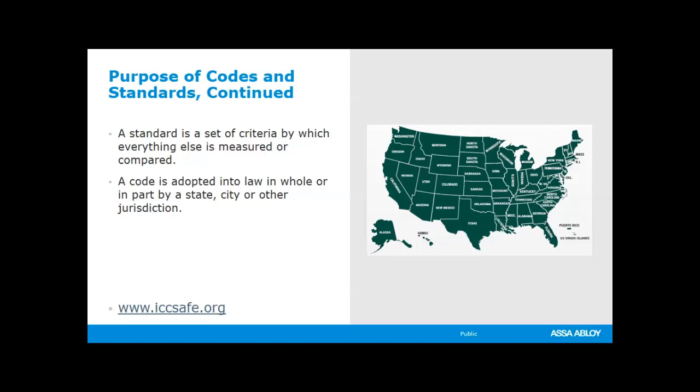And sometimes you may have to compare the two to find out what that is. Sometimes you may have an architect or a contractor that can tell you, but when in doubt, you do need to look it up rather than make assumptions.

These are comparisons that I have created, and I will send these to you after, but it goes through the different code versions, IBC 2006 through IBC 2018, and where the specific code reference is, as well as NFPA 101, 2006 through 2015.

As you can see with controlled egress, we can only use that in two types of occupancies. And one of the occupancies that can use it happens to be one we'll be talking about today, Group I1, assisted living. And those are going to be your senior memory care, where you have custodial care for the people that are living there. And it started in IBC 2015 as well as 2018.

So if you have a project that is under IBC 2012, you cannot use controlled egress. If you have a project that's IBC 2015, you can. NFPA 101 has allowed it since 2006. You'll hear me say AHJ, the authority having jurisdiction. You may have a fire marshal or local AHJ that will allow it, even though IBC doesn't, and that's okay. They have to grant a variance. They have to say that it's okay in writing for you to do that.

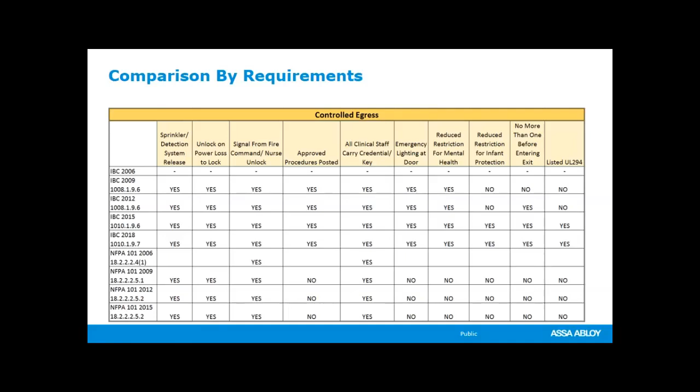Delayed egress. Delayed egress has a lot more use in the different types of occupancies. The only ones that can't are Group A, assembly, Group E, educational, and Group H, high hazard. So unless you have an assisted living facility that has assembly mixed in, for example, the dining area, if there's a dining area and you have more than 50 people, you cannot use delayed egress. If you have Group I1 assisted living, which is the 5th column over, you can use delayed egress virtually everywhere as long as you follow the requirements in the code.

And Group R residential, I point this one out because assisted living could be a residential occupancy. And I will explain that in just a moment. There's two different ways we can classify assisted living facilities. And it's very critical that you know for your project area which one it falls under. It changes dramatically what you can and can't use for hardware.

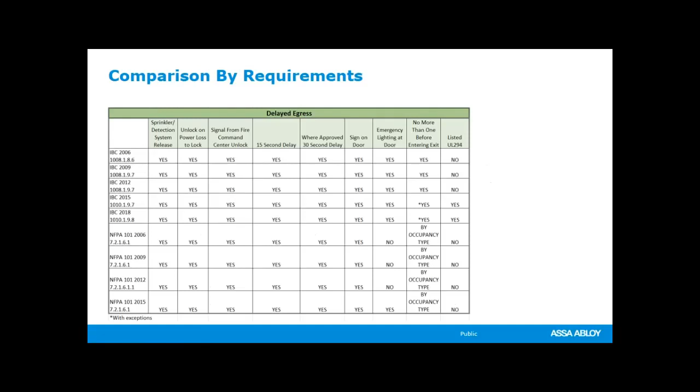So after comparing the different occupancy types by code, I also have a cross-reference of the requirements for delayed egress. And they're very similar, as you can see. The code references might change slightly, but it gives you a chance to know exactly where to go to look it up and a snapshot of the different code versions, what is or isn't required.

Means of egress: I want to make sure that we are on the same page, because where you put controlled egress and where you put delayed egress matters, because in some cases you can only have one in a path of egress. So what is a path of egress? It is a continuous and unobstructed path of vertical and horizontal egress travel from any occupied portion of a building or structure to a public way. And a public way is just safety.

A means of egress consists of 3 separate and distinct parts: the exit access, the exit, and the exit discharge. We do have many exit access doors within a project. Most of the doors in a building are exit access doors. They lead you to an exit. And so because of that, we have to treat exits and exit access doors the same when it comes to hardware, but it's important to understand the distinguishing difference.

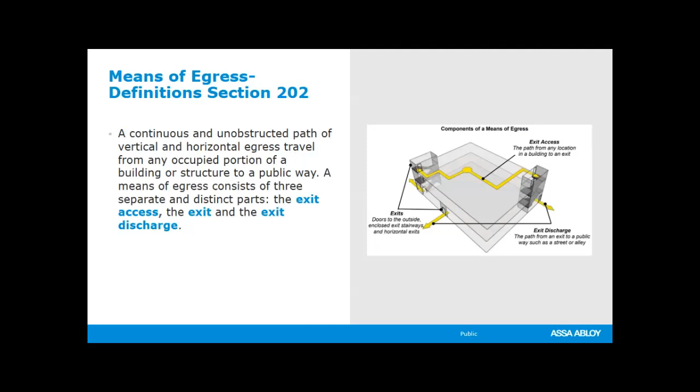The exit access is that portion of a means of egress that leads from any occupied portion of a building or structure to an exit. So all the area shaded in gray is that exit access. If I am here in the multi-purpose room, this is exit access. This would be an exit access doorway. And I get out to the corridor. I have the choice now between 2 separate exits. I can go left to this exit stair or take a right and go to this exit stair. I'm probably going to go to the closest one unless I smell smoke or see fire heading in this direction.

So you go out, exit access. All of the doors on this floor would be exit access doors, except for the ones going into the stairs, and those are actually the exit. The exit is that portion of a means of egress system between the exit access and the exit discharge or public way. Exit components include exterior exit doors, which many of us think of when we think of an exit. Those are indeed an exit, but also interior exit stairways are an exit. Exit ramps, exit passageways, exterior exit stairways and ramps, and horizontal exits.

So once we get into the stair, we are now separated from the rest of the building. We have fire protected openings and fire resistance rated walls, floors, and ceilings. In a high-rise building 4 stories and higher, we have 2 hours of protection and 90-minute B-label fire doors protecting the stairs. If it's 3 stories or less, it's 1 hour fire rating and 1 hour protection for the door.

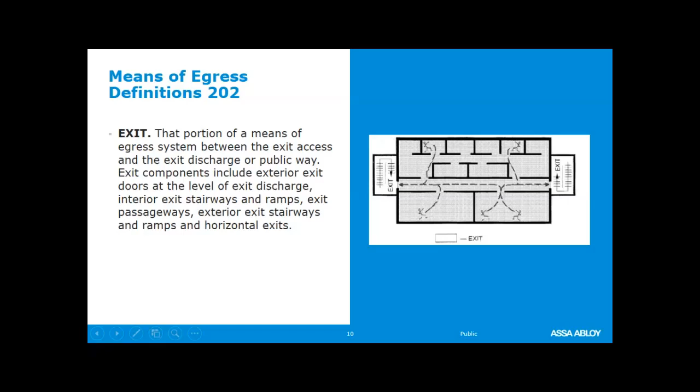A horizontal exit: if we have a very large building, the maximum size of our fire compartments or smoke compartments is 22,500 square feet. And therefore you'll see a horizontal fire barrier that separates this part of the building from this part of the building. So if the fire starts in this fire compartment, once I cross through this double egress door, I'm now not in the compartment of the fire origin, and I am protected by 2 hour fire barriers for 4 stories and higher, or 1 hour fire barrier if it's 3 stories and less. So these double egress doors become an actual horizontal exit.

Once I get through this door, I'm still on the same level, but I could either wait for someone to rescue me, I'm in what's called an area of refuge, or I can continue my path of exit travel, get to a vertical exit stair, and down the stairs and out of the building. So horizontal exits, you'll see those in memory care and assisted living facilities all the time. Not all of them are horizontal exits, however. They have to be B-labeled fire doors in order to be an exit. Other than that, it's an exit access or a smoke barrier, and those are completely different. They're still in our means of egress, though.

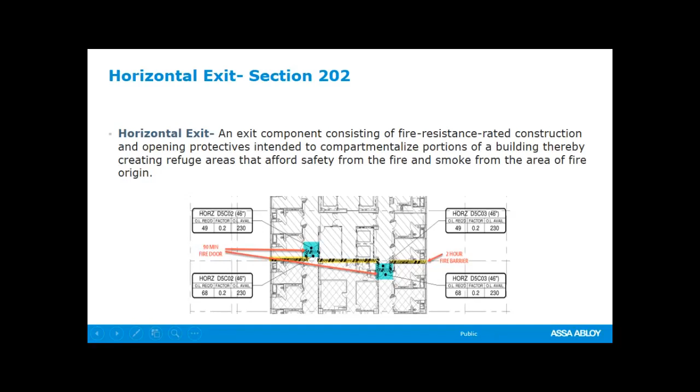Okay, so different types of occupancies. I mentioned institutional group I. It's defined in the building code in chapter 3. What you will be most using would be the I1 assisted living facility. And the difference here is because it's institutional, this is where patients have 24-hour supervised environment and receive custodial care. And because of that, people are not capable of self-preservation.

In the middle of the night, if there was a fire and people had to evacuate the building, these people are not capable of getting out of bed and walking to the exits by themselves. They're going to need some help from the clinical staff. And that's why we have areas of refuge where they may move the patient while they're still in their bed. And that's why we see wider doors in assisted living facilities that are custodial care, as well as healthcare facilities, your hospitals and nursing homes. So I know you do a lot of different assisted living facilities. If it's custodial care, then it falls under the I1 classification or designation.

The residential group R assisted living facilities are group R4. They are supervised facilities, but the patients are capable of self-preservation and they don't have to rely on staff to evacuate them in a fire or other emergency. R4 occupancies are independent living facilities. The occupants can exit the building, as I mentioned, without assistance.

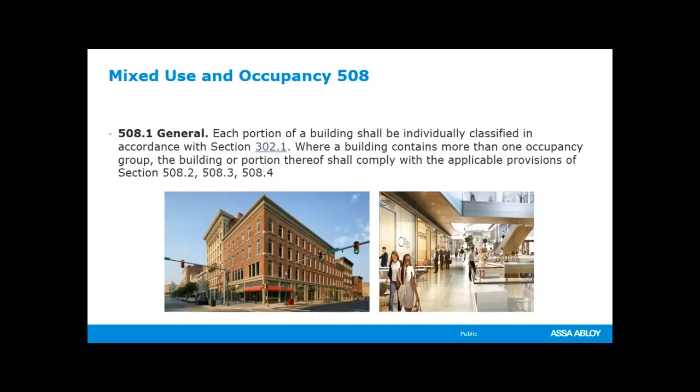Okay, so locking the door on the egress side. Unless by specific permission, we are supposed to have free egress, one motion free egress from the egress side, unless by exception. So in 1010.1.9.3, and this is IBC 2015, locks and latches shall be permitted to prevent operation of doors where any of the following exist. 1, places of detention or restraint.

This is typically talking about mechanical locking hardware on the egress side. And this is left wide open so that the AHJ can assess the risk based on the number of occupants, the type of facility, the type of structure. Is it a wood frame structure or is it steel stud? Is it concrete walls? Are they fully sprinklered? They will assess the risk based on all of those factors and then determine whether or not you can lock the door on the egress side. And again, this is from a mechanical standpoint.

There are 4 special locking arrangements that the code recognizes, and that's where controlled egress and delayed egress fall into. So unless by specific permission, we can't lock the door on the egress side. Controlled egress, we are actually locking the door on the egress side with a mag lock. This is a typical cross-corridor pair of doors, and this is actually in a hospital. It could very easily be assisted living, but the card reader will release the mag lock from the egress side and allow me to exit. If I'm not authorized, then depending on where this is in the building, it probably needs to be tied into the fire alarm to release so that at the time of fire, I can exit the door.

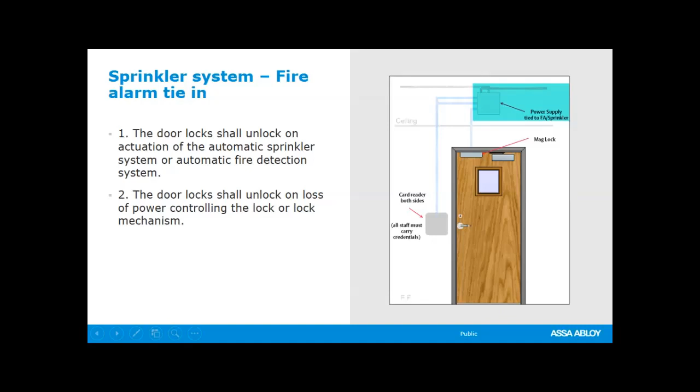3, the door locking system shall be installed to have the capability of being unlocked by a switch located at the fire command center, a nursing station, or other approved location. The switch shall directly break power to the lock. Because it's electrified, any switch can be wired to unlock remotely, whatever the distance away. So this really is very easy to achieve. And you may or may not be the one that is supplying all of those different switches, but just be aware that it is a requirement.

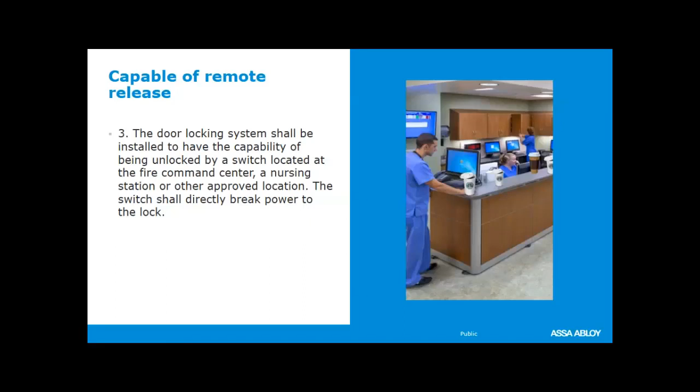4, a building occupant shall not be required to pass through more than one door equipped with a controlled egress locking system before entering an exit. That's why I went through the definitions. When we look at our life safety plan and you look at the location of controlled egress and the location of your exit, you're not allowed to have more than one in a path of egress before entering that exit.

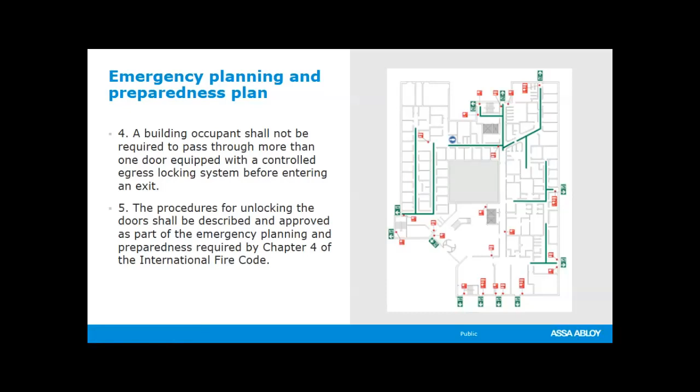Procedures for unlocking the door shall be described and approved as part of an emergency planning and preparedness as required by Chapter 4 of the International Fire Code. And 6, all clinical staff shall have the keys, codes, or other means necessary to operate the locking system. So whether this door starts in a locked position or not, with the card reader, all staff must carry the credentials in order to unlock this door on the egress side.

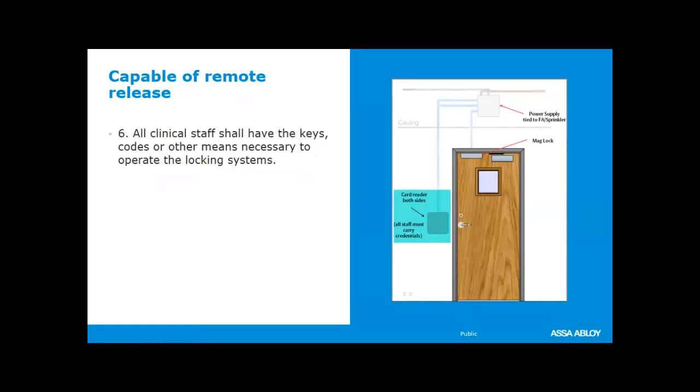Emergency lighting shall be provided at the door, and the door locking system unit shall be listed in accordance with UL 294. And as you can see, this is from Securitron. These are all the various listings. UL 10C is for fire. UL 294 is an access control standard.

And there are a couple of exceptions which will not pertain to you. Items 1 through 4 shall not apply to areas of behavioral health or psychiatric treatment. And items 1 through 4 shall not apply to infant protection systems. There is no group of exceptions for memory care. Maybe someday they'll add it, but out of the box, you have to meet all of the requirements for controlled egress, and you are not exempt from items 1 through 4. So the most common applications of controlled egress would be behavioral health areas, dementia units, memory care units, infant patient wings, maternity wings, etc.

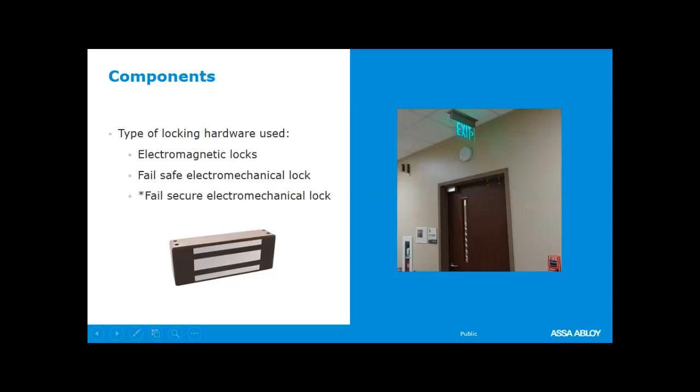And the type of hardware that you would use, the types of components, you're going to have a mag lock most of the time. It's fail-safe by nature, or you could use a fail-safe electromechanical lock, either a cylindrical or mortise lock that is locked on the egress side, and only by exception could you use fail secure, and that's for behavioral health or infant protection. It does not apply to your types of projects.

Securitron makes a whole line of mag locks from 600 pounds to 1,200 pounds holding force, or 1,800 pounds of holding force. They make other types, and typically with memory care, you're somewhere in the 1,200 pound range.

Delayed egress is the second special locking arrangement. This one is going to sound an alarm. I think everybody's familiar with what delayed egress is. Let's look at our requirements. As I mentioned before with the cross-reference chart, delayed egress is used in more applications than controlled egress. This does lock the door on the egress side, and it can be used anywhere except for Group A, which is assembly, Group E, which is educational, K through 12, and Group H, which is high hazard.

So the only place in your building that you need to look at is if you have some Group A intermingled with your I1 assisted living senior memory care. That dining area, if you have a dining hall that has more than 50 people, that's Group A assembly, and you can't use delayed egress or controlled egress from those spaces. And that can get a little bit tricky. They either need to separate the dining area completely so it has its own exits directly to the outside, or they need to come up with some other way.

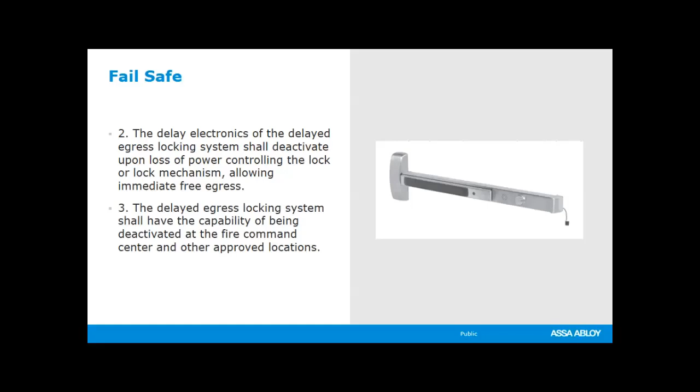4, an attempt to egress shall initiate an irreversible process that shall allow such egress in not more than 15 seconds when a physical effort to exit is applied to the egress side door hardware for not more than 3 seconds. There is a nuisance delay that's built in. If little Johnny is visiting his grandma and he can't read the sign that says push, there's a loud alarm, and his mom pulls him back away after he pushes on that exit device or pushes on the door, as long as she pulls him away before that nuisance delay, it will not set off the alarm. But initiation of an irreversible process shall activate an audible signal, a very loud alarm in the vicinity of the door.

Once the delay electronics have been deactivated, rearming the delay electronics shall be by manual means only. That means that somebody from the assisted living facility needs to come to the door, check it out, what happened, what set this off, and rearm at the door. Most delayed egress systems have a built-in key switch. It can be a key switch, it could be a card reader, it could be any kind of other than just a push button switch that anybody can reset. It's got to be something that carries a credential in order to rearm the delayed egress.

And there is an exception for where you can have 30 seconds, but that typically does not apply to memory care units unless you talk to the local AHJ and get it approved.

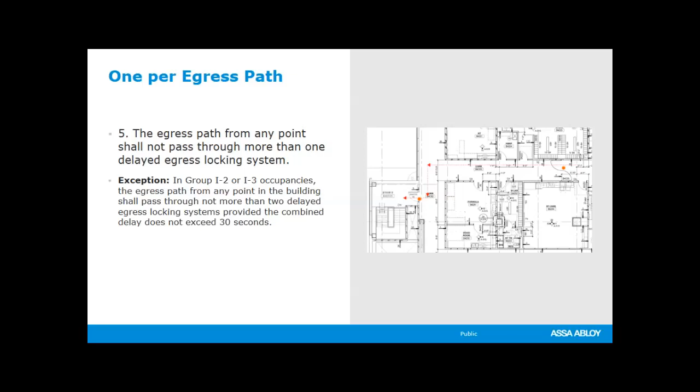A sign needs to be provided. Most of your hardware comes with a sign that says push until alarm sounds, door can be opened in 15 seconds. Emergency lighting provided on the egress side of the door, and delayed egress locking system in accordance with UL 294.

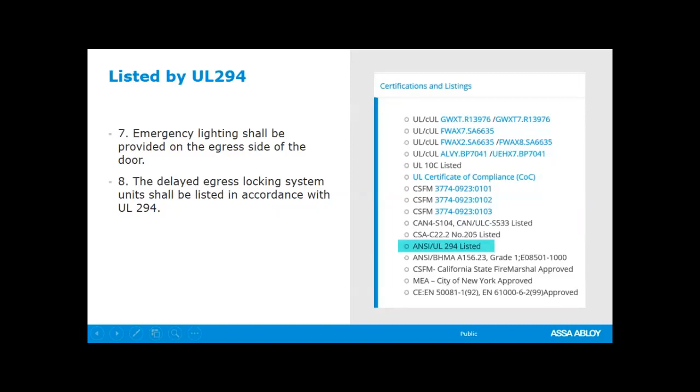The most common applications: the side or back door of a business, the side or back door of a store, doors in hospitals to restrict public access. And from your perspective, you can use these either in I1 or R4, senior living and memory care, to restrict the wandering elderly patients.

Types of hardware that can be used: Securitron makes a delayed egress mag lock that has everything built in. It has the key switch to reset built right into the unit. These are great if you have an existing door with existing mechanical hardware. You just have to get wire to this and tie it into the system however you need to.

If it's new construction and you don't need an exit device, you could use this with a cylindrical lock or a mortise lock. Depending on the type of door that they have, how wide the stile is will dictate the type of hardware that you should kind of lean toward. You can also get exit devices with a full built-in delayed egress. Sargent makes them, Corbin Russwin, Yale.

At Sam's request, I will be making some generic hardware sets specific to both controlled egress and delayed egress, so that you've got the list of components. What normally goes into this type of opening, whether it's an exterior door, a stairwell door. We'll talk about stairwell reentry here in just a minute. And then maybe even some other typical interior doors. But to start off with, I will be creating hardware sets typical for exterior doors and stairwell doors that you will normally be supplying these components.

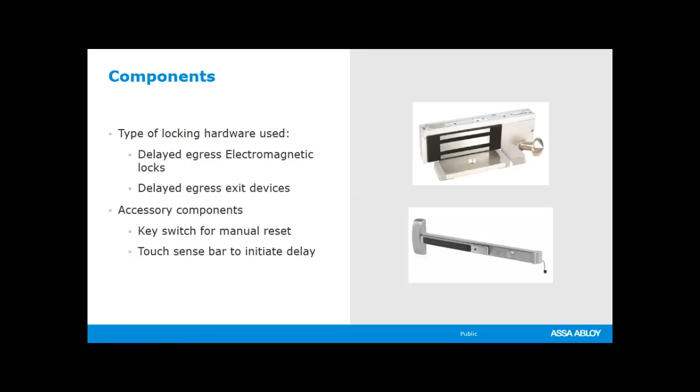There needs to be some kind of key switch or manual reset that takes a credential. It could be a card reader even. You may need a touch sense bar to initiate the delay, depending on the type of unit that is selected.

And just once again, to refresh your memory, controlled egress can only be used on I1 assisted living, 2015 and 2018 IBC. Anything prior to that, you need a written variance from your local authority having jurisdiction. NFPA 101, it's been in there for years. So you may be able to get permission fairly easily, since it is something that's been out there for quite a long time. You may not have too hard of a time getting approval for it.

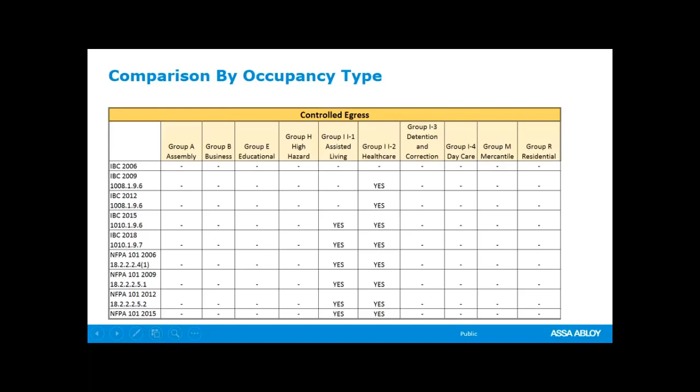Delayed egress is used in both the I1 assisted living or the R4 assisted living. You can use it on either. Just remember the rules: no more than one in a path of egress.

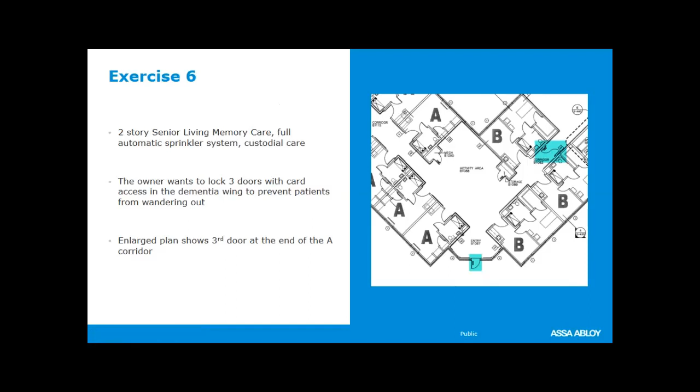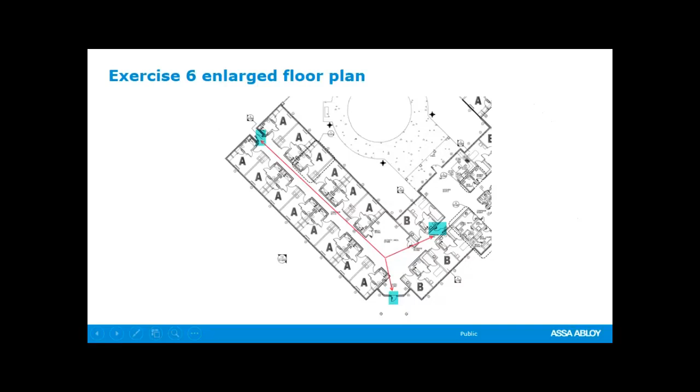here, here, and here. So if a patient gets up and they're wandering and they're within this door, the WanderGuard would lock the door. How would we do that? What is the occupancy type and what code compliant hardware? I'll just give you a minute to think about that for yourself.

And the answer is, it is Group I-1 assisted living because it is custodial care. And because of that, if we're going by IBC 2015, which this presentation has been, that means that we could use either controlled egress or delayed egress.

And the nice thing is, these doors are all three separate paths of exit. So this is one exit. Here's a different path to that exit. And this may be an exit access to get to this door. It doesn't at this point really matter because it's a different way from the other two. So we could lock all three of these doors to keep this wing secure from the other.

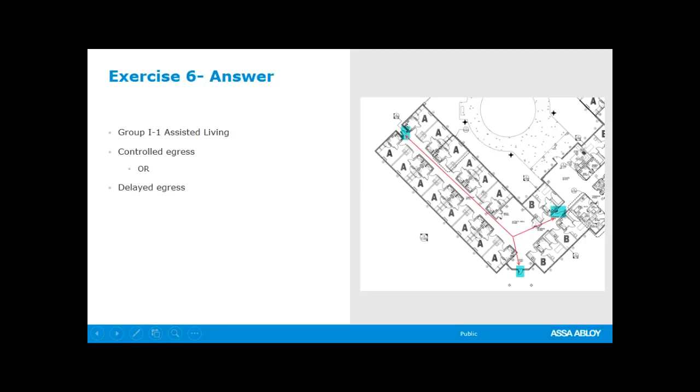And as I mentioned, whether you use a mag lock for the controlled egress and it only locks when the patient is picked up on the sensor, or delayed egress where it's always locked and when they're within range of the sensor, it sends staff and they go get them before hopefully they sound the alarm.

And the last thing I want to talk about code-wise before we get into the hardware is stairwell reentry. What is it and why is it? When we think of stairs, a stair is an exit. It gets us out of the building. And we're protected once we get into the stair with fire barriers that are either 2-hour rated or 1-hour rated, depending on the height of our building.

The longer that we're going to be spending in that exit, in that vertical stair, the more protection we need. So 4 stories and up, 2-hour fire rating, and 3 stories or less, 1-hour fire protection rating. But once you get into the stair, you should be home free. The stair is going to take you down to the level of exit discharge. The door at the bottom of the stairs gets us out of the building and free and safe.

But what if you get into the stair and as you're exiting, you smell smoke? Now, typically, there's nothing flammable in stairs. They keep the stairs clear of any obstruction. There shouldn't be any boxes or any flammable materials sitting in the middle of the stairs. But we do know it's a changing world and people are flying airplanes into buildings and therefore taking stairs and making them basically a chimney. Or this was an actual fire in 2003 at the Cook County office building in Chicago.

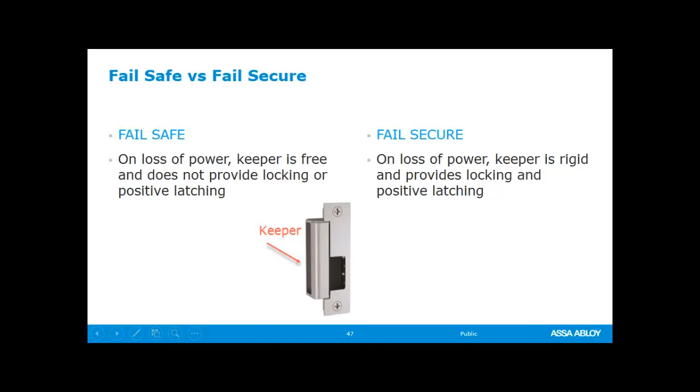So when we think of stairwell re-entry, electric strikes are not permitted. In order to have re-entry, we'd have to make them fail safe, but that doesn't provide positive latching, and 99.9% of the time, they're going to be fire rated doors. They have to have positive latching.

And then mag locks do not provide positive latching. They are fail safe and fail safe only. They are unlocked on loss of power. They must meet special locking arrangements. So if you're going to use a mag lock going into a stair on a memory care unit, whatever the case may be, you have to have some other type of latching hardware, either a mortise lock, a cylindrical lock, or an exit device. It will be passage on the stair side, so the mag lock locks the door. On fire, it would drop, and you could get in or out of this exit door.

IBC, low rise versus high rise. Low rise stairway doors need to comply with Chapter 10 of the IBC. High rise stairway doors, the hardware is exactly the same. There's one additional requirement that doesn't affect what we supply or what you would be supplying, but high rise stairway doors are covered in Chapter 4 under the special use and occupancy type. But the difference is when you have 75 feet or higher above the lowest level of fire department vehicle access, that's considered high rise.

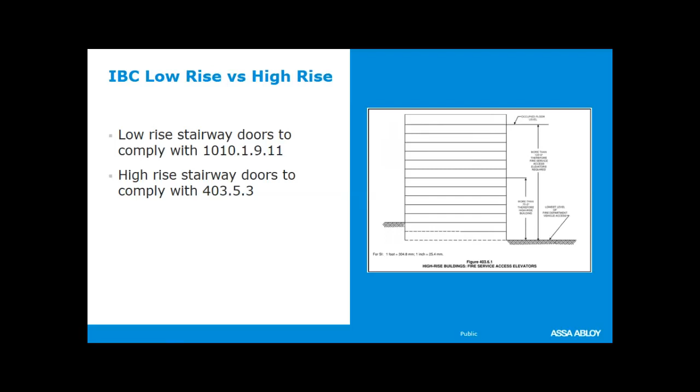So here it is from Chapter 10, the low rise requirements. Interior stairway means of egress doors shall be openable from both sides without the use of key or special knowledge or effort. This is the only place in the building code that tells us we have to unlock the door on the ingress side coming in. It does not apply to the ingress side of the exit discharge door.

Once you leave this stair and you're outside the building, you do not have to come back in. And if you do need to come back in, you've got to go back around to the front entrance. So this is not meant to leave the building unsecure. The door at the bottom of the stairs going out does not apply to this requirement. And it says it does not apply to high-rise doors arranged in accordance with 403.5.3. They have their own special rules, but hardware-wise, exactly the same.

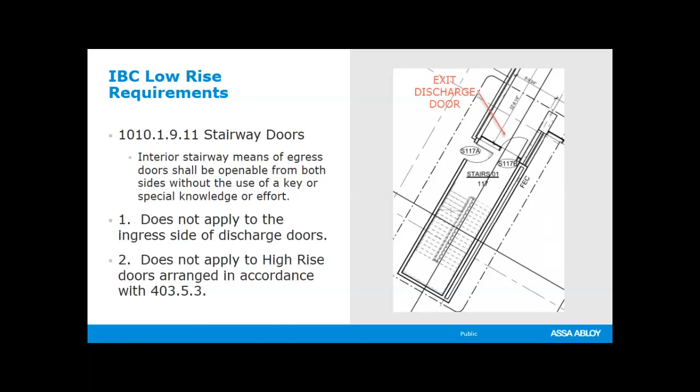3, the doors are permitted to be locked from the ingress side, provided that they're openable from the egress side and capable of being unlocked simultaneously without unlatching upon a signal from the fire command center, if present, or by a signal from the emergency personnel inside the main entrance to the building.

So all of our stair tower doors from the stair side can be locked, but they have to be locked with a fail-safe locking that will unlock on the fire command center or on fire alarm, depending on where they want it unlocked and under any conditions. So it's got to be fail safe. So if the power is out, you can re-enter and find another exit.

The only additional extra thing you need in a high-rise building is every 5th level, there needs to be a 2-way communication system installed. I don't believe this is part of your package, but if it is, it's not a piece of hardware, it's just a panel that goes on the wall every 5th level, so that if somebody needs to get in, somebody at the fire command center can push a button and remotely let them back in. Hardware-wise, it's exactly the same thing. The door needs to be capable of unlocking simultaneously without unlatching by a signal from the fire command center.

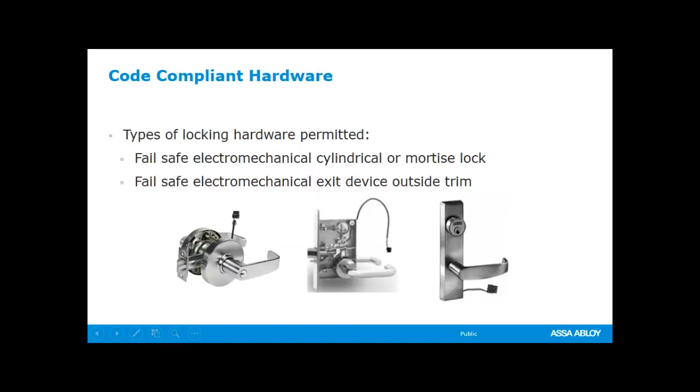What type of hardware is code compliant? Fail-safe electromechanical, cylindrical, or mortise locks. They're fail-safe, so free egress to get into the stair, and at the time of fire, they would simultaneously unlock and allow re-entry. Exit device trim that is fail-safe would comply. You could have a passage mortise or a passage cylindrical with a mag lock. The mag lock is fail-safe.

As long as it meets all the requirements for controlled egress, you would be fine to have the mag lock on a fire-rated door as long as it's got a latching device and a closing device with it. You could also have delayed egress, where your exit device has passage trim and you've got the built-in delayed egress system, or delayed egress exit device with fail-safe trim on the other side. Either of those meeting all the requirements for delayed egress would be okay. And sometimes those stairs, you want to prevent the patients, the elderly, from wandering into the stairs so that they can't get out of the building.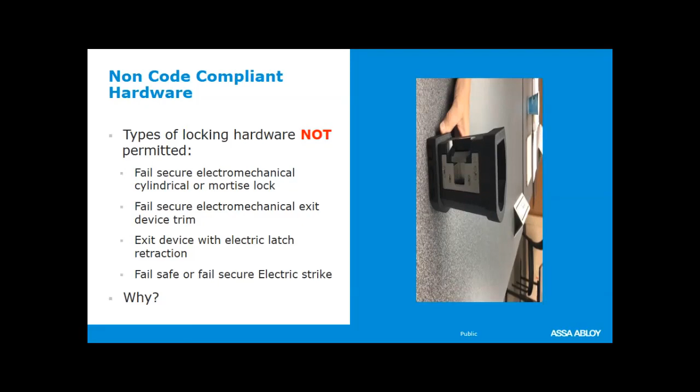Fail secure electromechanical or cylindrical or mortise locks, fail secure electromechanical exit device trim. They're not permitted because if the power goes out, fail secure, there's no way to unlock them simultaneously. Same thing with exit device with electric latch retraction. In order to remain positive latched, it needs to be in the latch position, but then you can't have re-entry at that point. And same thing with fail-safe or fail-secure electric strikes. You can't use those. As I mentioned earlier, fail-safe would allow re-entry, but doesn't give you positive latching, and fail-secure gives you positive latching, but in an electric strike, it doesn't give you the re-entry.

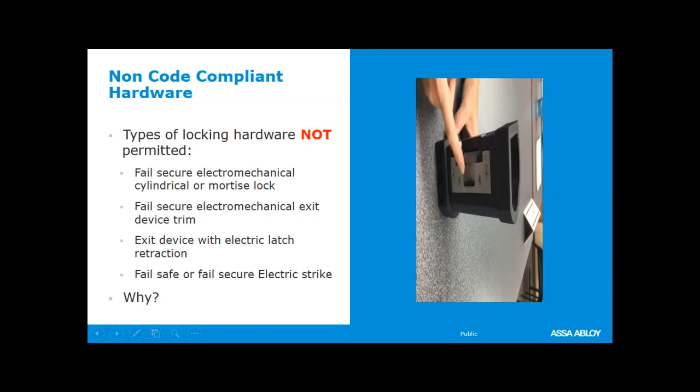Now let's get into hardware schedules. What are they? What's a door schedule? Where do you find the information that you need as far as manufacturers and different things like that? So hardware schedules follow DHI's hardware sequence. DHI is the Door Hardware Institute, and they have created a standardized sequence for hardware that basically follows the installation track. What's the first thing that you would do?

Well, the first thing you would do is hang the door. So selecting the hinges or hanging the door would be the first item, and then securing the door, what type of lock or latch, control the door. Do we have a closer, some type of control device, maybe a power operator, and then protect the door. That's all the accessory things like kick plates and wall stops, weather stripping, thresholds, and those kinds of things.

So the format, when you look at a hardware set, is always going to be in this same sequence. If it's a pair of doors, the inactive leaf is secured first. So you hang the door, and then it should be the inactive leaf, then the active leaf, and then same thing for control the door, inactive leaf, then active leaf, etc. Let's take a look at a sample hardware set. It gives us the quantity of hinges, the lock, the closer, etc.

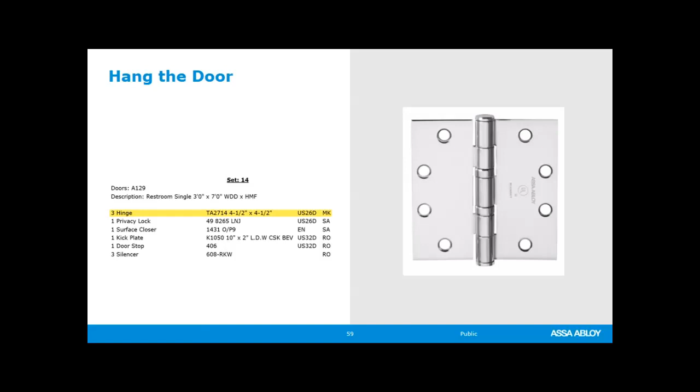We'll look at the first item, the hinges. A lot of times the architect on submittal will get a cut sheet to go with, so that you can see the specifications of the manufacturer, the base metal, all of that information. The privacy lock itself, what are the functionalities, extra accessories that may come with that, different options for thicknesses of the door, things like that.

Door closer, when you're detailing the closer, the specific arm that comes with it, whether the door swings in or out. Kick plate, the size, the specification set will say that it's 2 inches less door width. When you're detailing it, you would put it down as the actual size based on 2 inches less than the door width. The door stop, type of anchoring, what do you need to order that? Make sure you get the right material.

And then in this case, silencers, could be smoke seal. You could see weather stripping here. And if it were an electrified hardware set, at the very bottom, you would have an operations narrative. I do have some examples of those. We'll talk about why they're so very important.

And then all together, here is the door that we just talked about. You can see it's got the standard hinges. It's got a mortise privacy set. It's got a door closer on it, a wall stop. And when I'm in the restroom, it's got a thumb turn on the inside so that I can lock the door. And then one motion, turn the lever, will retract and let me out. So that's common sequence for hardware sets themselves.

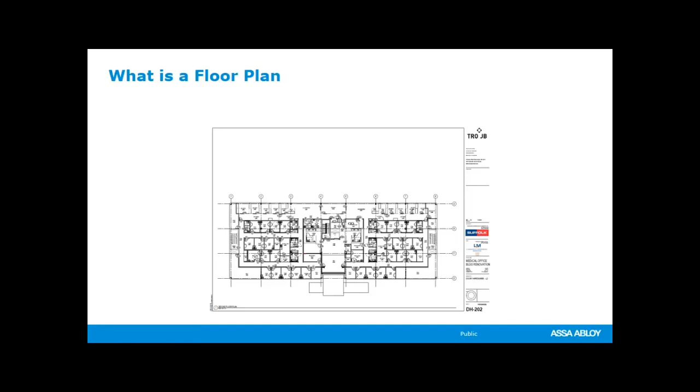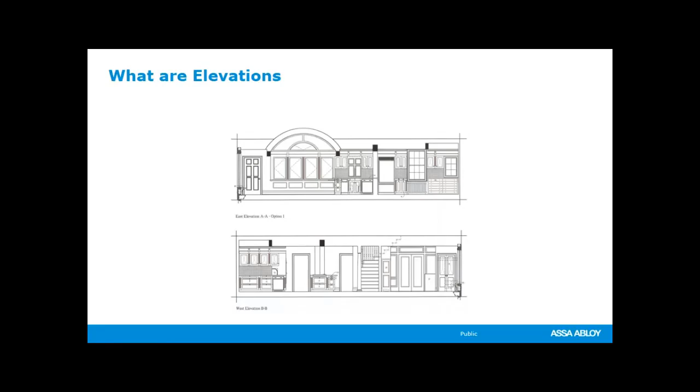You can look at your frame: do you have room to run the wires through the frame to get it to the lock and the locking system? What type of head? Do you have a 1-inch head face or a 4-inch head face? You need to be aware of those kinds of details.

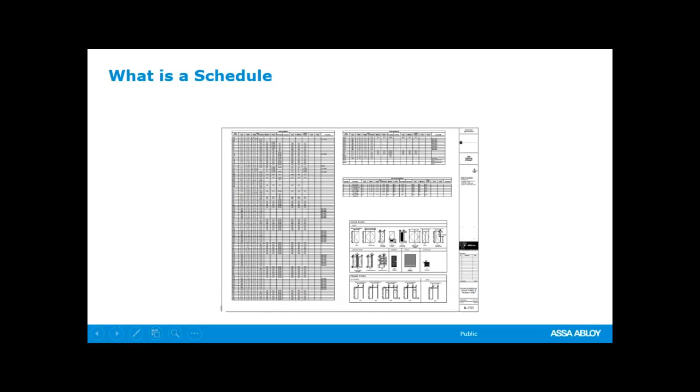And then the specifications. CSI, the Construction Specifications Institute, has a MasterFormat. So it's a standard method, no matter what project you're working on in North America. Every architectural firm has all 50 specification divisions organized in the same fashion, so that you can always find the information you're looking for. The different divisions that have an impact on our industry: Division 1, the general requirements for the bid date and warranties and project closeout, anything that applies to every specification section in the book.

Division 08 is openings. That's our stuff: doors, frames, hardware. Our electromechanical hardware may need to tie into the access control. That's going to be Division 28. Who supplies the card readers? Who supplies the WanderGuard? Where is it tied into the electrical and fire alarm and those kinds of things?

So if we look at the breakdown of a division, the section numbering: 087100, that's door hardware. That's our stuff. The first 2 digits, 08, represent the division number. So we know that Division 8 is openings. Door hardware belongs on door openings, so it starts with the 08. The next 2 digits, 71, are the subgroup, which is level 2. And then the third 2 digits represent level 3, which can expand into additional spec sections.

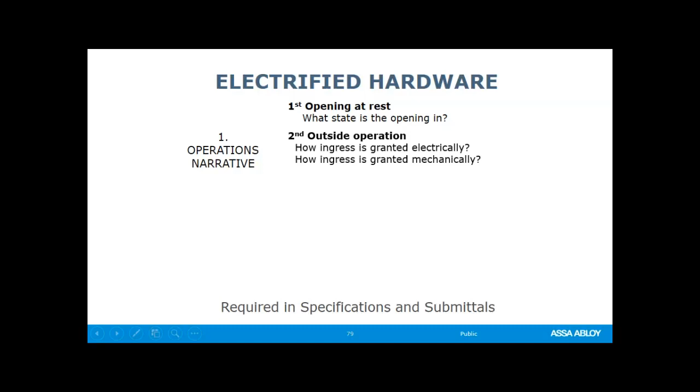The second item is, how is the outside operation? How is ingress granted electrically? Is there a card reader? Is there a keypad? What is the electrical ingress? Or is it just a remote release from a nurse's station or from any location, wherever that may be? And how is ingress granted mechanically? Many times when we have electrified hardware, we have a key override, so that if the power goes out and if it's a fail secure lock, we can still get in with a key mechanically. So you may or may not have key override, and if you don't, then you wouldn't have that listed.

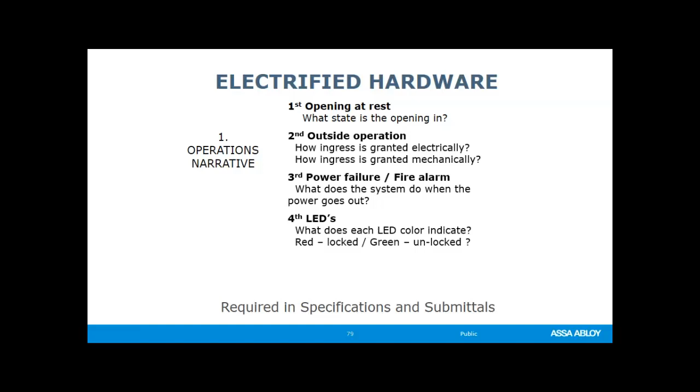The third item, what happens on power failure? We talk about fail safe versus fail secure. Does the item stay in the lock position and still grant free egress, or is it fail safe and will be unlocked at the time of fire? If there is fire alarm, what happens on fire alarm? Is the power dropped immediately, or is there a 5-minute delay before it's unlocked? What specifically happens on power failure? Fourth, if there's LEDs, what does the LED indicate? Red is locked, green is unlocked. Those are pretty common. You may or may not even have LEDs. You can skip this from the operations narrative if it doesn't apply.

And the fifth is inside operation. The fire marshal, the AHJ, is going to be very curious as far as what happens here. If the inside is free for egress at all times, no problem, they'll move on. But if there's a delay of egress, what happens and what makes it code compliant will be listed here. Is it controlled egress? And again, if it is, then there would be a little bit longer description here of what happens on the inside. With a patient that's wandering near the opening, they're picked up on the wander guard system, which locks the door immediately, and the door remains locked until the patient's far enough away from the sensor. Something to that effect. These operations narratives should be found in a specification hardware set as well as in the submittal hardware set.

This is the way that the owner can tell that they're getting what they want. This is the way the architect can confirm that all of the hardware that is being supplied is compatible and will work within the system. And it also protects you.

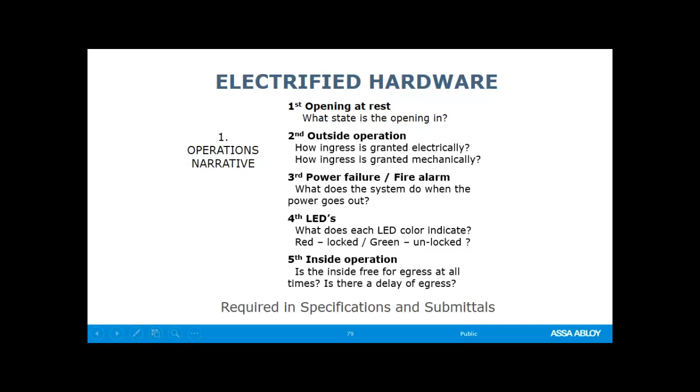If you're providing some kind of wander guard system and you get this approved and you wire it up and install it and everything is working the way that the operations narrative described it, and then the owner changes their mind, now it's much easier to get a change order because you've already said, this is how it's going to be wired. This is the description of how this whole opening works. So whether you're working with somebody else's operations narrative or you're creating your own, it is critical that these items are listed. So here's an example of a pretty typical opening.

Door normally closed, latched, and secure at all times. Presenting a valid key code will unlock the electric strike for 5 seconds. Mechanical key override at all times from the outside. During a power failure, the lock will remain secure. Red LED, the door is locked. Green LED, the door is unlocked. Free egress from inside at all times. That covers the bases, short, sweet, to the point.

Everybody could wire this up if they needed to, and everybody could build a hardware set from this description based on knowing, okay, we've got an electric strike, it's going to be fail secure, we're going to have mechanical key override, so I'll use a storeroom function lock set, and you can build the hardware set based on this description.

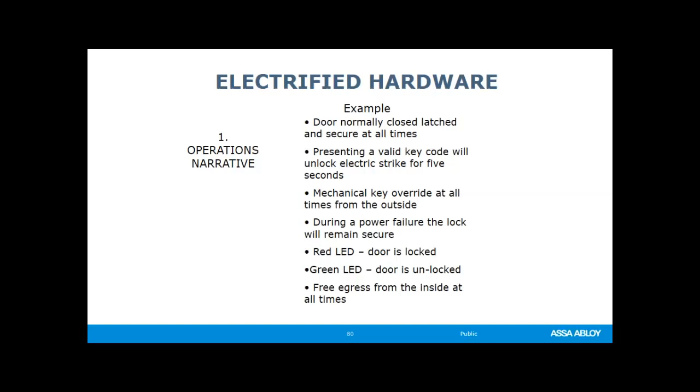The electrified hardware, this is the hardware list just for the electrified hardware components. If you were supplying the entire opening, you would put it in DHI format: hang the door, secure the door, control the door, protect the door. But in this case, they're just listing the components for the electrified hardware.

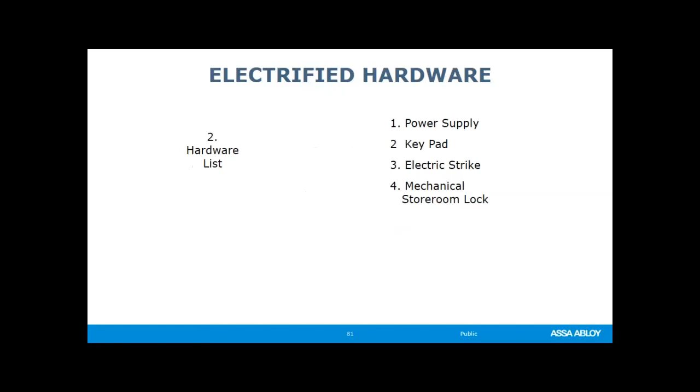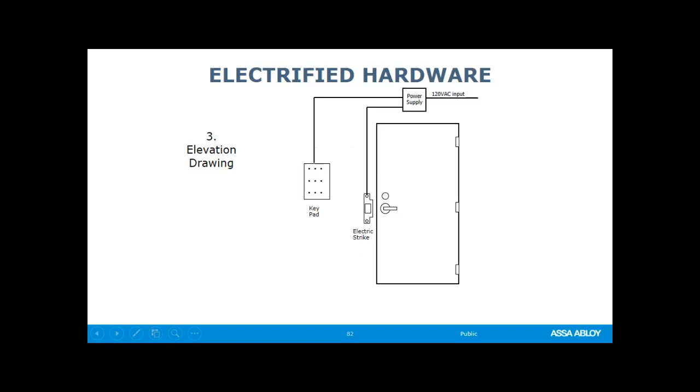You could also turn it into an elevation drawing showing the location of the keypad, the electric strike, your incoming power, your power supply. And then from there, somebody can build a wiring diagram that's point to point, the actual system wiring diagram from the power supply, which exact relays that we're using and where.

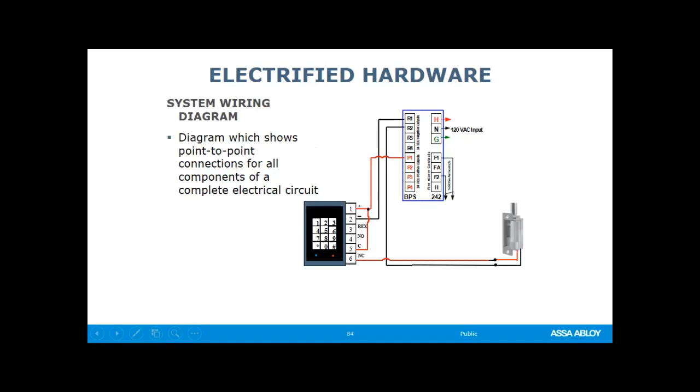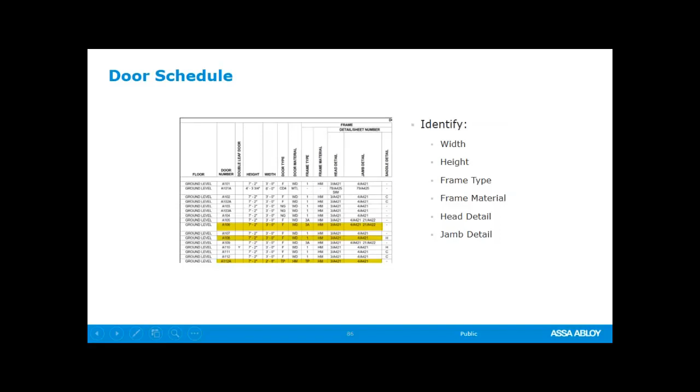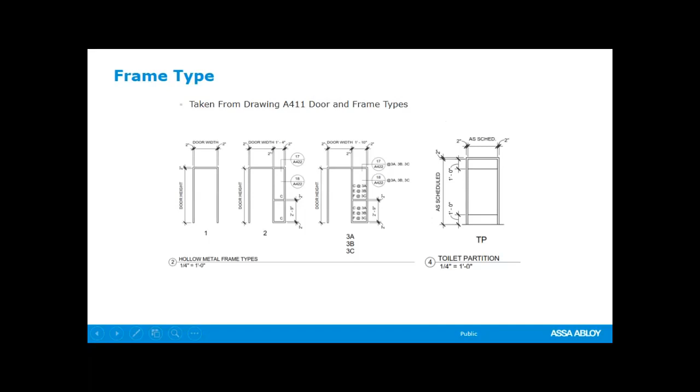You can pick up your frame information. Is it a 3-sided frame? Is it a sidelight frame? If it's a sidelight frame, that may change where you have to bring wires, especially if they get quite large. Your door elevations, flush doors are really easy to put hardware on because there's no limitations.

But if you get a glass kit that comes down in here and you've got an exit device that goes across, do you need a shim kit? What type of stile do you have? Do you have enough width for a full mortise lock, or does it have to be a narrow stile mortise lock? Exit device, vertical rod, do I have enough room on that door? Those are kinds of things you need to know. What is the door elevation?

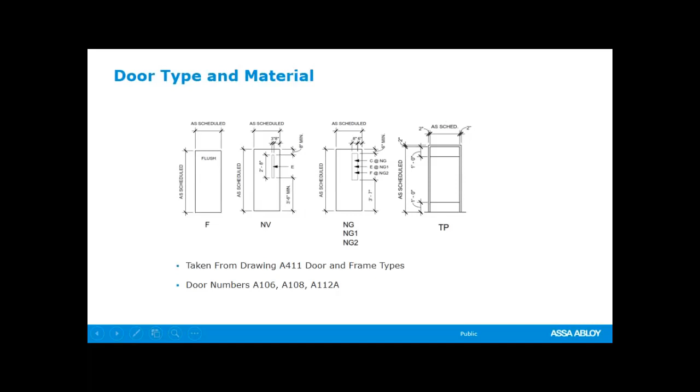And then the hardware set, as I mentioned, will be the last column on the door schedule. It'll give you the set number, and then from there you go to the spec book and look at part 3, the very final part. It lists all the hardware items for those doors. And if this happened to be one that had access control or delayed egress or controlled egress with the WanderGuard, then we would put the operations narrative right